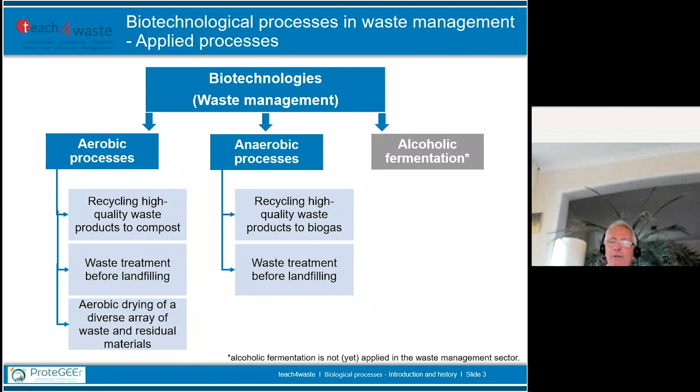And so why biotechnologies are so important in the area of waste management. And I will give you some specific properties about biotechnology. On one hand, you can use it as large, you see here, and small technology, like the composting in your own garden or a small facility in agriculture area, and huge one in more or less agriculture style, industrial style.

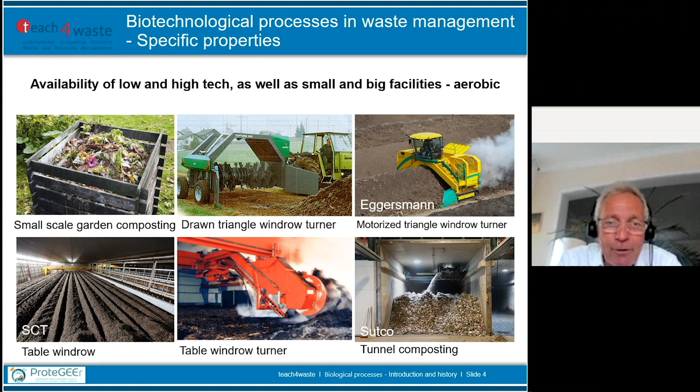That means you start with some kilograms and at the end, the biggest facilities I know from Dutch, it's around 800,000 tons a year. And we have these different areas also in the anaerobic process, in the biogas production process.

You see here a very, very small anaerobic digestion plant. I know it from Vietnam, and a very simple technology in Germany. It's a technology, not so complex, and the high-tech technology. So we have all technology, we use all over the world.

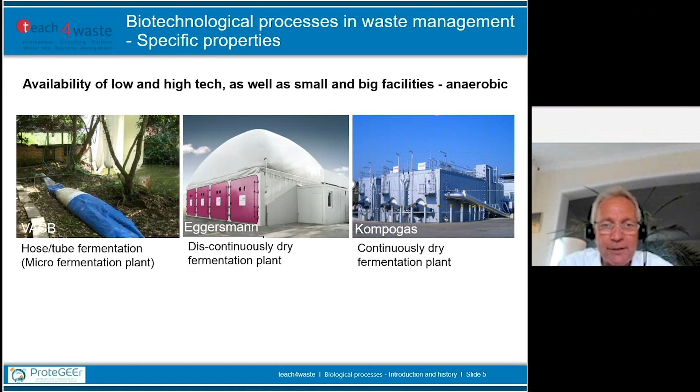Another point, and for me it's a very, very important part: when you are in the area, when you are living in countries like development countries, threshold countries, or emerging countries, there is a very important question you have to ask and answer. This is the question of employees. What's about working places? There's a technology, also with composting, where a lot of people are working inside, and this is fully automatically. So when you have enough working places, this could be an option.

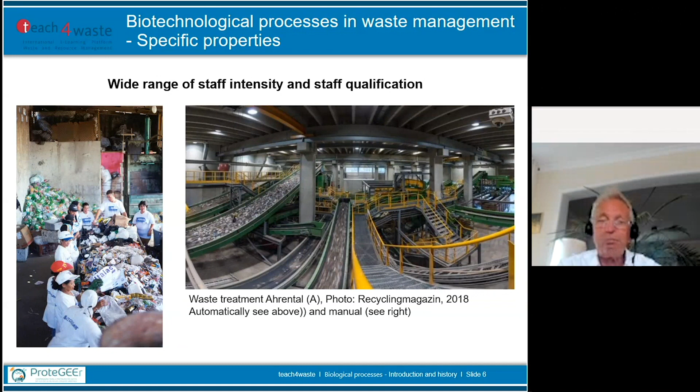But if not, this is a very important part, because this is one question you have to answer according to sustainability. Because one of this column of sustainability are the social aspects, nearby ecological aspects. So this is the consequence: you have very cheap technologies and very expensive technologies. So you can use it and implement it everywhere.

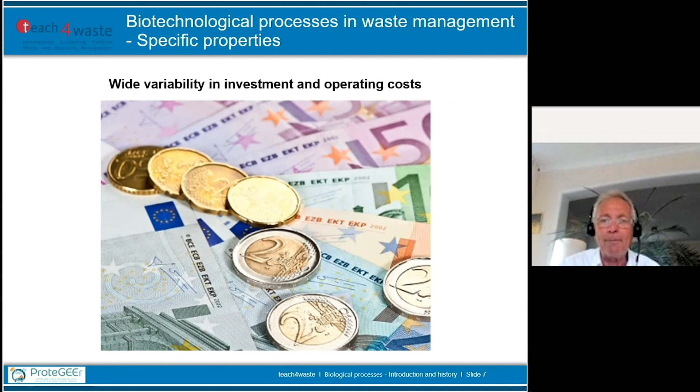Last picture: because of this small and big, it's possible that you can implement decentralized applications. That means, for example, compost facility 1, 2, 3, and 4, and you have only one equipment of technology, for example shredder, screening, windrow turner. So it could be, for a huge rural area, a very interesting concept for your country or for your area.

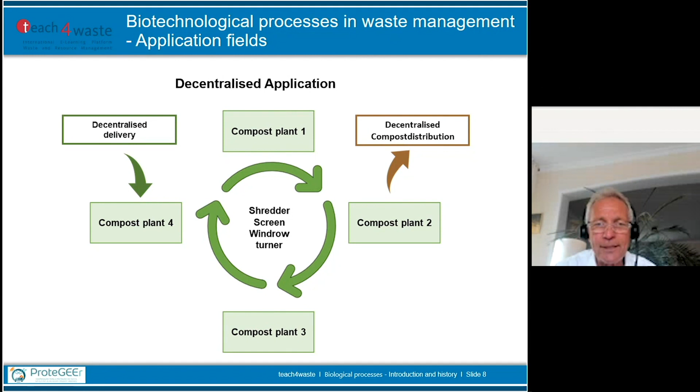Don't be afraid of the next part. I will talk a little bit, I'm absolutely sure only a little bit, about microbiological fundamentals.

So we start with some fundamentals. Microbiology means you have very small organisms. This is the first main point, and these are the oldest organisms we know, around 3.5 billion years ago they appeared on our world.

Some higher organisms we have since 750 million years. But what is most important for microorganisms? They are on one hand ubiquitous, they are everywhere, omnipresent, and they are very adaptive. That means they could live from more or less 0 degrees up to 135, from pH value 1 to, meanwhile we know, some 1 to 14, and high salt and pressure amplitude.

So these are organisms where the most important thing is they are very adaptive, also very adaptive to the different kinds of raw materials we have for composting treatment on one hand, or for anaerobic digestion.

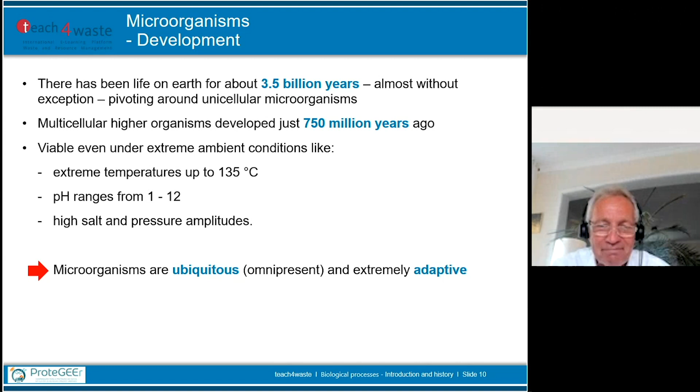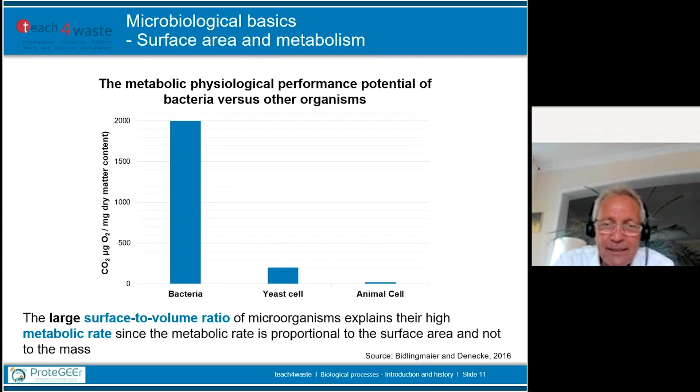But like human beings, they are what they eat. That means bacteria need more or less the same ratio in the raw material to have an optimal degradation process. So 20 to 5 to 1 is the ratio we need in the raw material as an orientation.

So we have to talk about enzymes. Why? Without enzymes, it is not possible to have an efficient degradation of the products of photosynthesis. Microorganisms mainly use biocatalysis, meaning enzymes reduce the half-life of reactions from 300 years to about 1 second.

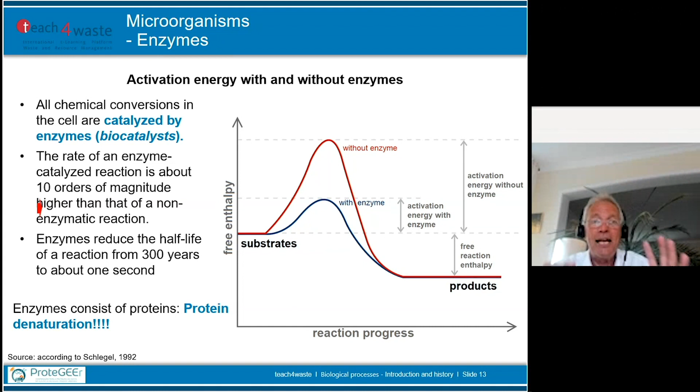At first, the activity of the proteins, the enzymes, rises more or less parallel to the rising temperature. But there is a moment, a temperature level, where we get protein denaturation - it's more or less like a fever in our body - and then the activity of the enzymes collapses. This happens in the area between 50 and 58 degrees.

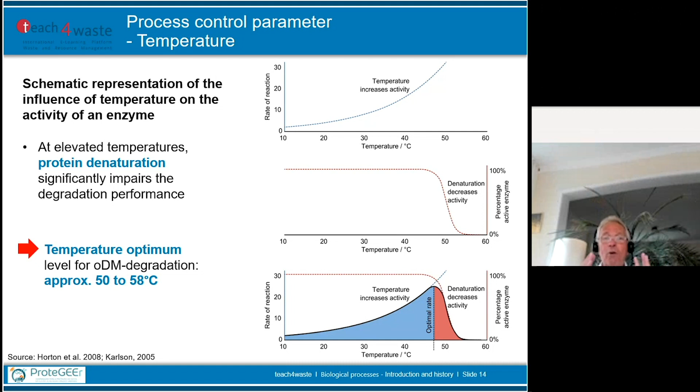So if you want a high efficiency of degradation using enzymes, the only way is to operate your process lower than 58 degrees. This is not always very easy, but it must be the target of the composting process.

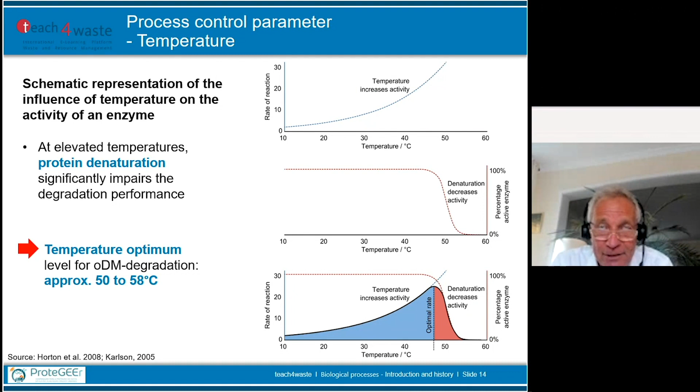The next point, when we talk about microorganisms and microbial degradation, is photosynthesis. I don't want to explain it because everybody knows what photosynthesis is. This is the basis for all biomass production, and also the following products of animals. All biomass products are based on glucose, starch, proteins, fat, cellulose, and also hemicellulose, lignin, and humic substances.

But when you have this so-called loss of ignition, this is a kind of analysis where you more or less burn the sample. Then also the other organic components will be burned—that means plastic, rubber, and leather. At the origin, plastic is an organic component; it's oil-based or coal-based, same with rubber and leather. But these components are not available for microorganisms, and everybody has heard about it—otherwise we wouldn't have the problem of marine litter.

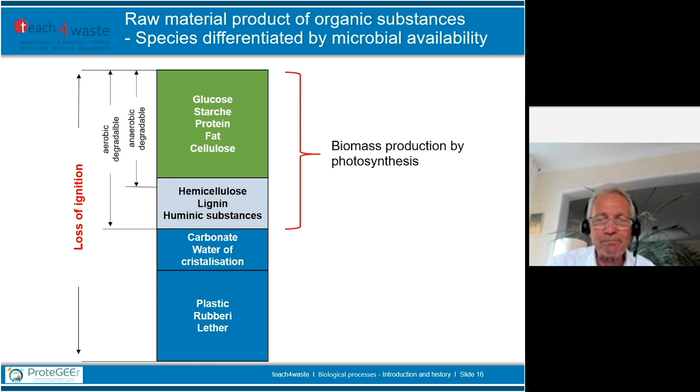And there is a differentiation. All of these organic components are degradable by aerobic microorganisms, by the composting process—also hemicellulose, lignin, and huminic substances. And for the anaerobic process, that means the process where we produce biogas, the microorganisms can only degrade glucose, starch, protein, fats, and cellulose. So we call this the so-called biochemical omnipotence. That means all products created by photosynthesis, and also the following products like animals, are degradable by microorganisms. This is so-called biochemical omnipotence.

And otherwise, if we didn't have this biochemical omnipotence, we would have more or less a 40 meter high column on our Earth made of organic components. Relevant for all this degradation are bacteria, actinomycetes, and fungi. And again, this biochemical omnipotence is based on the aerobic process, that means with the use of oxygen.

Sorry for these pictures, but if you want to go a little deeper in this area, you have to know a little about the different phases of composting. Christiane can present the script of this lecture—it's meanwhile 350 pages, and you can read about it there. For me, I only want to explain a little bit about the last step, number 4. This is a so-called respiration chain. In this area, the main demand on oxygen can be gained by the microorganism, and otherwise the highest amount of energy in the form of ATP can be generated.

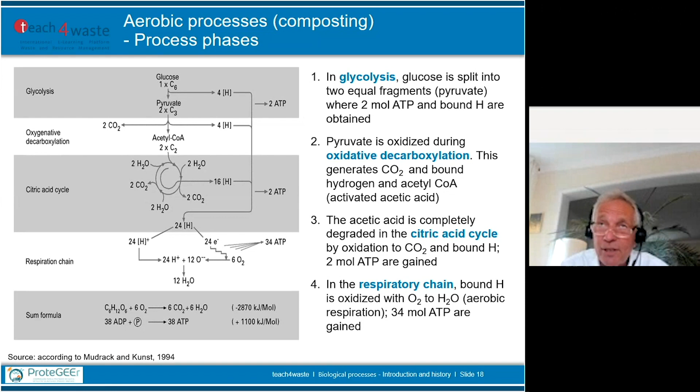So there are some structural facts you have to learn. This is, for example, the aerobic degradation process. We have glucose, C6H12O6, plus 6 O2. The result is 6 carbon dioxides and 6 molecules of water. But what is very important is that you also get a lot of heat and ATP. That means you release a lot of energy during the degradation process, and the microorganism can use a part of this energy to recreate biomass.

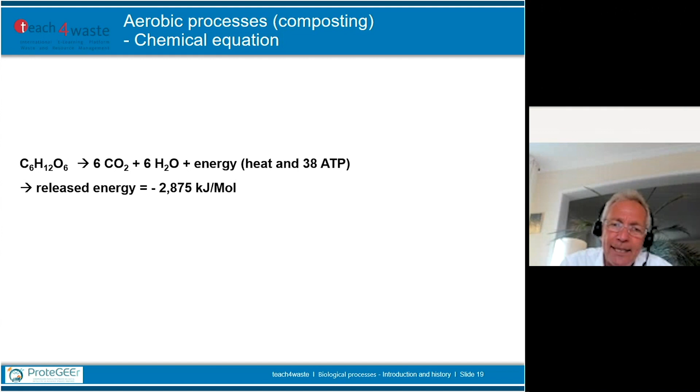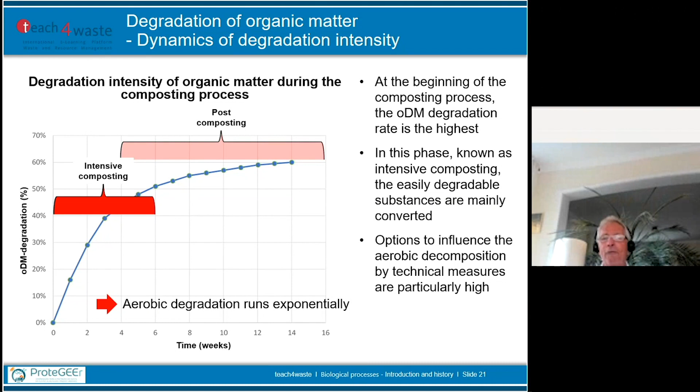This is very important for these two processes: the aerobic one, and the anaerobic one I want to explain next. Again, the aerobic process has a degradation which runs exponentially—this is very important. At the beginning, when you have the easily degradable components, you have high performance, and at the end the intensity decreases. Now we move to the area of the anaerobic process, that means biogas production. These are the components: carbohydrates, fats, and proteins.

In the first phase we have the hydrolysis. You can describe it in a technical way like a shredding process—large molecules are shredded into very small ones so that microorganisms can degrade them. It's called the hydrolysis phase. The second is the acidification phase, meaning there is production of acids. The third is the acetogenic phase, and the last is the methanogenic phase, in which the methanogenic microorganisms produce, from H2 and carbon dioxide, methane, and from acetic acids as well.

Here is a very important part: these two processes you can drive with oxygen and without. So the entire anaerobic process is partly aerobic and partly anaerobic—the third and fourth phases are absolutely anaerobic processes.

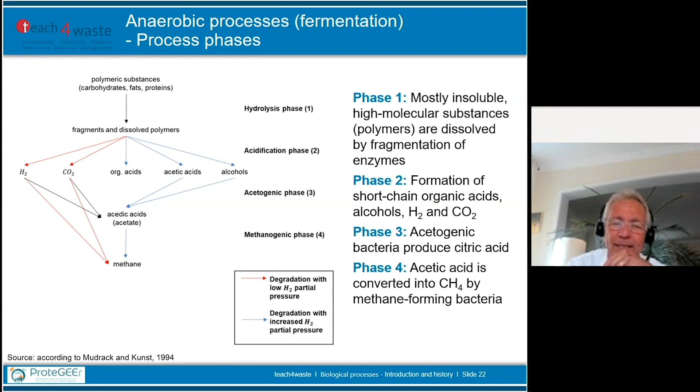So now this is right. Again, we have the same raw material—an idealistic kind of biomass. We have production without oxygen, and as a result we get carbon dioxide and methane, and only 2 ATP, a very low amount of energy. But, you know, in physics we say there is no lost energy—it's not possible that you lose energy. So again, we have 36 ATP from the composting process and only 2 from the anaerobic process.

This is the reason that when microorganisms could choose, they take the aerobic process, because it's much better for gaining energy for the reproduction of cell mass. So when we have an anaerobic process and you introduce oxygen, immediately the anaerobic microorganisms will die, because the microorganism group will change to the aerobic process by using oxygen.

Next slide. Oh, sorry. Yes, sorry. No, again, the water.

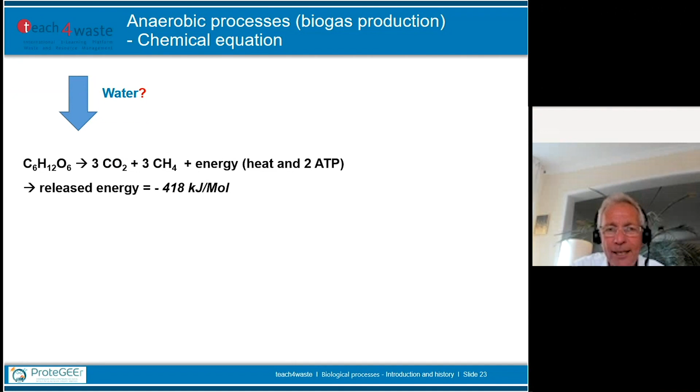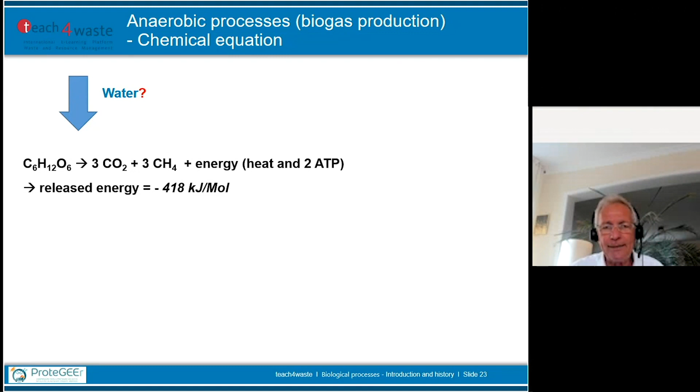I don't know why we find in the literature only this structure. Normally, when you make an entire mass balance, you find it in the script. You have to add water. Without water, no chance to degrade materials. So the real formula is much more complicated, and you have to add nitrogen, you have to add sulfur, and so on. But this is a good way to explain this kind of faults. And the same, like in the aerobic process, we find a degradation which runs exponentially.

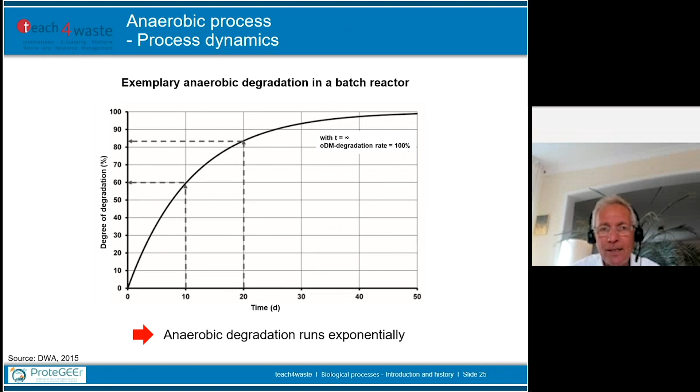So before we talk a little bit about raw materials, I will present you a very simple result, an ecological result. We make a lot of ecological balances, and at the end, it is a very clear result. The cascade utilization, that means the combination of anaerobic process and post-treatment by composting process, is, from an ecological view, the best way for recycling of organic matters. So very important part.

We started in Germany, for example, with the composting process, and since around 20 years, we started to add also the anaerobic process. And at the end, you will see why it's a question of technology development, but also a question of money. But I think at the end, you will know why it's so complicated to implement this cascade utilization. Cascade utilization means at first taking out the energy, and in the second step, producing fertilizers and soil conditioners.

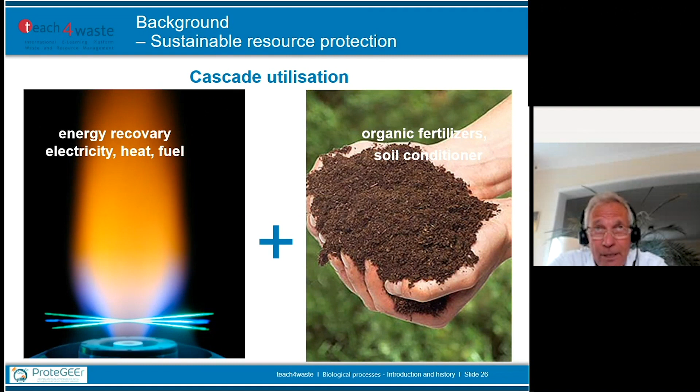Now I will talk about 50 minutes about raw materials. And we have to discuss, or you have to discuss, at the moment it's not possible, we have to discuss later, what is the best solution for everyone. For example, taking a collection system with the entire municipal solid waste, or having a separate collection?

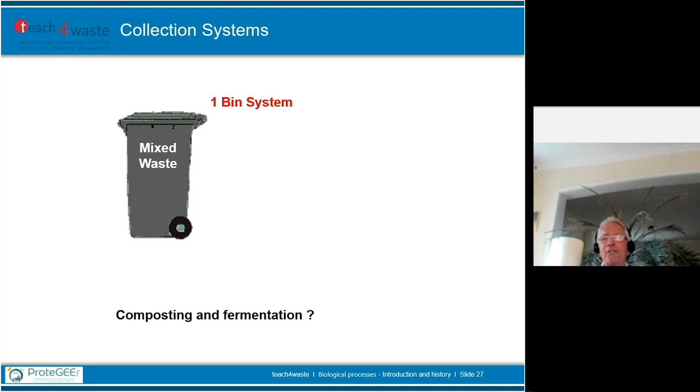Next slide. Okay, the main question is, do we need a separate collection in Germany, in Europe, worldwide, or not? And the problem is I can't give you a clear answer. But at the end, I think you will see where the problems are.

So we started in Germany in the beginning of the 80s with a separate collection of the organic kitchen and garden waste in the green bin, and we have the remaining municipal solid waste in the gray bin. So the main question and main requirement was to produce a better compost than in the history we had in Germany.

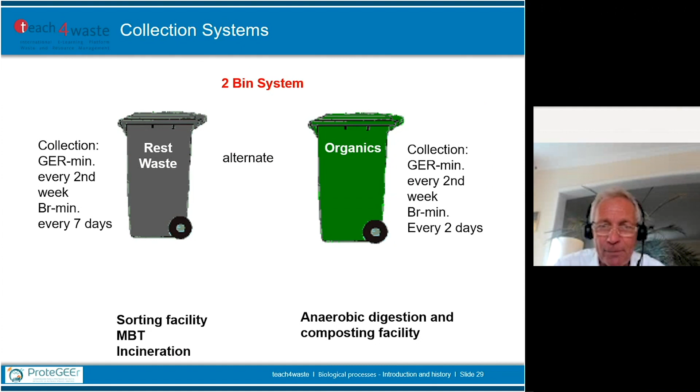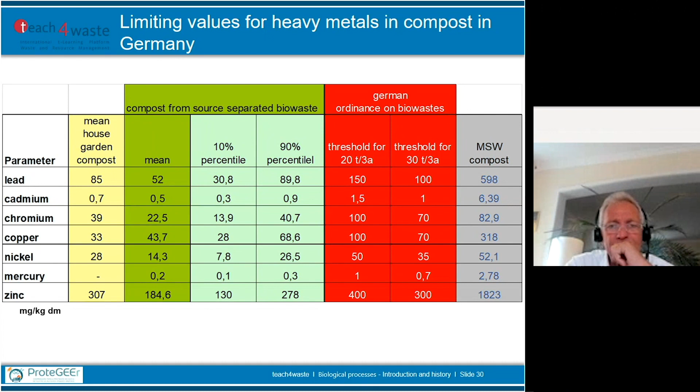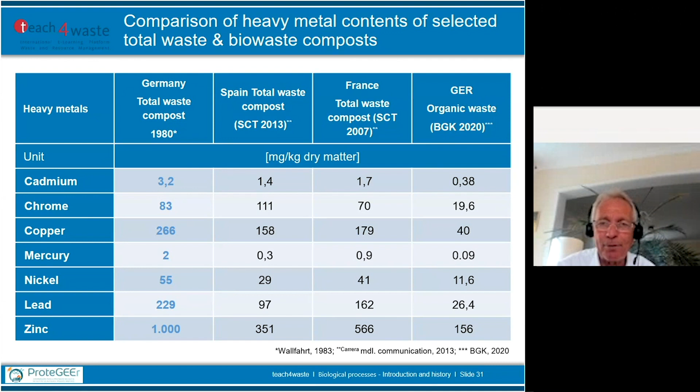And mercury. Background and reason for this reduction of heavy metals is the closing of sources of heavy metal emission. The main emissions are coming from wet deposits, that means from air emission, but also from fertilizers, for example when we talk about cadmium.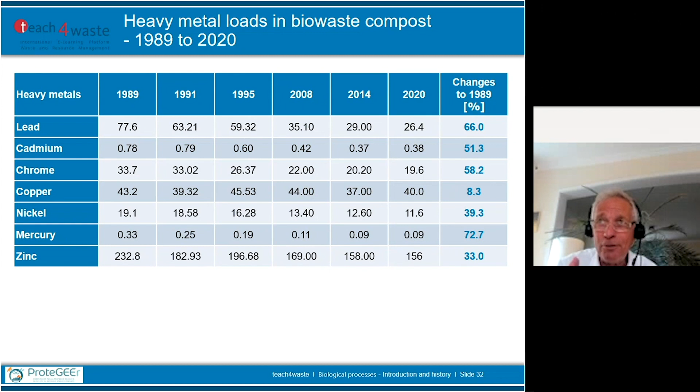So we have to ask, do we have the same development in other countries? Then maybe in combination with better technologies, we can reduce the amount of heavy metals. And you hear a little bit that I look for a reason not to do separate collection.

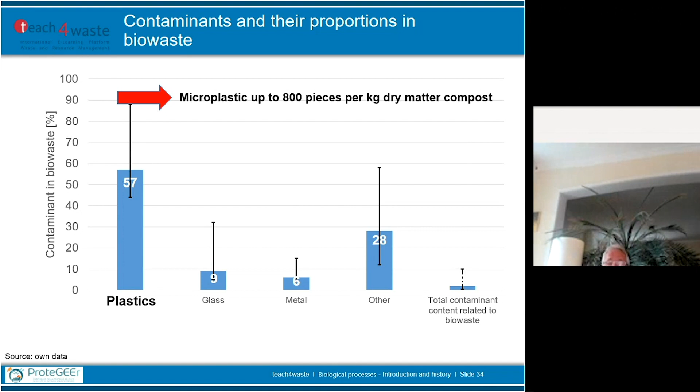So these contaminants in former times were not a problem. But now I will give you a number, you see it here on top. In German compost, we found 20 to 800 pieces per kilogram dry matter of microplastic.

When you have this background, we have to think about separate collection versus mixed waste compost. It's not only a question of heavy metals, it's meanwhile also a question of littering of plastic, particularly littering of microplastic.

So it's so complicated to find a way to release the opportunity to produce a mixed waste compost. Because of this problem with this high amount of plastic pieces or microplastics in the compost, we changed our law.

That means the law says all these refining steps to get out the impurities, we have to do before the composting process. Because in the composting process and in the shredding process, you shred the plastic and produce microplastic. At the moment, I don't see a way to find a solution to use compost from mixed waste.

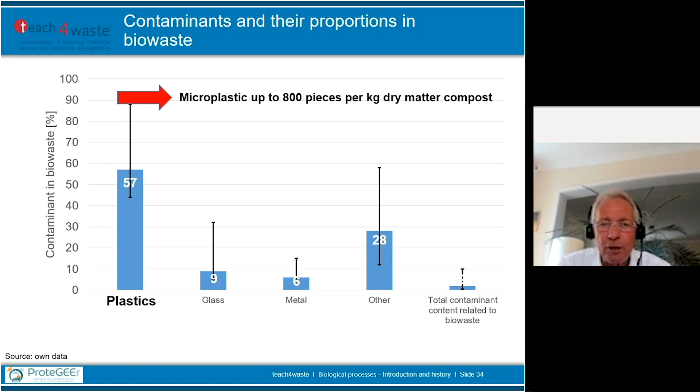And the worst separation in Germany of bio-waste we find in these social, not easy structures in our cities. So we have a high amount of plastics, a high amount of impurities, and a very low collecting rate.

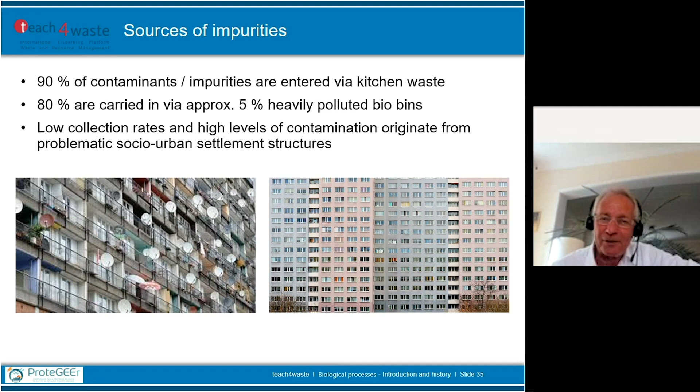So forget what I said about the quality of separate collection. I will give you the newest information about German waste composition, and come later on to international waste composition. We have in Germany separate collection of bio-waste, but in our remaining municipal solid waste bin, we have

39% of bio-waste. This is a very high number, and this means the separate collection doesn't work very well in Germany.

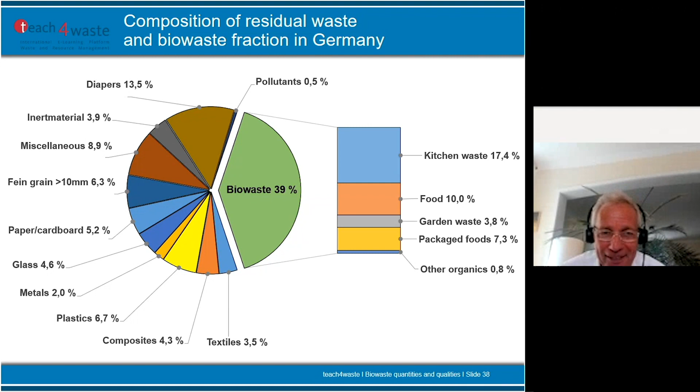But what we also see is when you look at how the composition of the bio-waste is, then we see 10% food, 7% packaged food. That means that we have in Germany every year 6.1 million tons of food in the waste only from households.

We also have around 6 million tons of food waste from industry and from trading. This is a value of more or less 21 billion euros every year.

And the first analysis we found was from the UK, they made the first analysis. In Europe the numbers are all more or less very similar. But what does it mean for composting and anaerobic digestion?

That means very clearly that this material, this 17%, is not for anaerobic digestion and not for composting. This material we have to avoid, because by avoiding this high amount of food waste, we could save a huge amount of greenhouse gases, energy and water in production. So, first point: to find a sustainable way for bio-waste is avoidance.

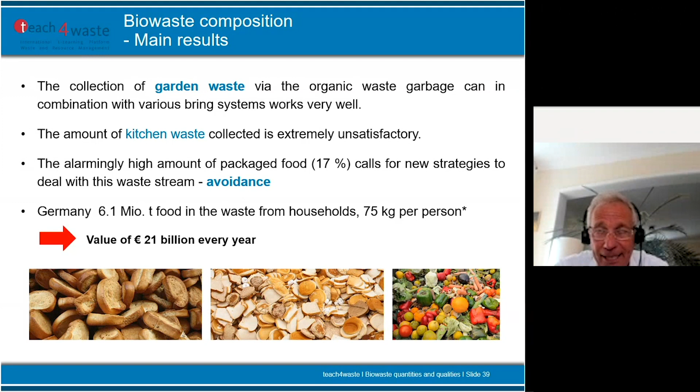When you compare this with paper and cardboard, it's 78%, or glass, 84%. And on the next slide you see we have these low degrees because some municipalities have only a collecting rate of 30%. But it is possible, when you do it right, with good PR work, good education, good controlling measures, to lift up the bio-waste collection to 82%, or paper and cardboard up to 92 or 96%.

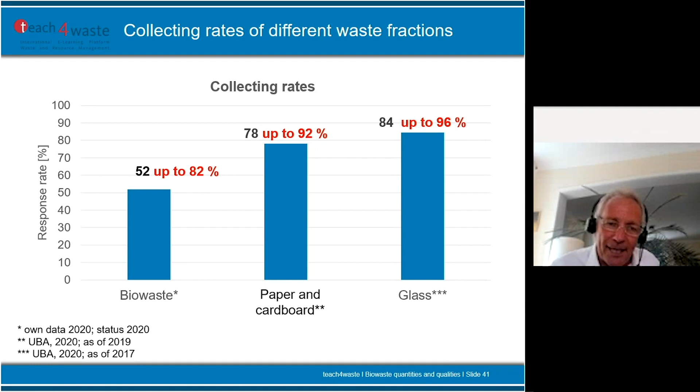So there is a very high potential for optimizing. This is the development in Germany. We started in 1983, and I think we needed more or less 15 years before the responsible politicians said, okay, this is an idea we have to lift up and implement in Germany. Now I think nobody discusses the bio-waste separate collection anymore. But at the end, we must say that despite this very high amount of education and PR activities, the collection rate in Germany is still too low.

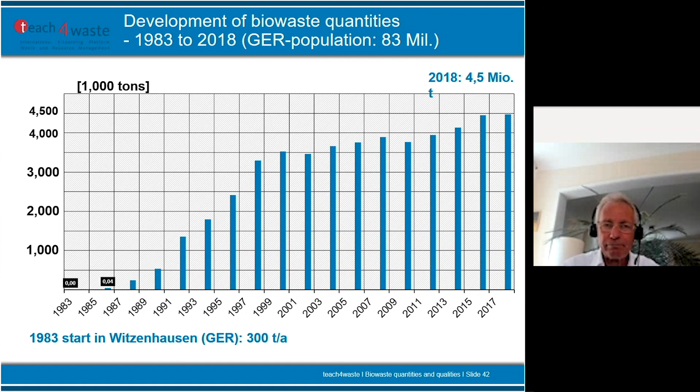Before we come to the composting process, let me give a short overview of anaerobic digestion. I've given numbers from Germany, but I'll also relate to other countries. This is the development of anaerobic technologies. We have more or less 10,000 facilities in Germany. 95% of these facilities are not dealing with organic waste, they deal with agriculture waste and special products produced from agriculture, not waste.

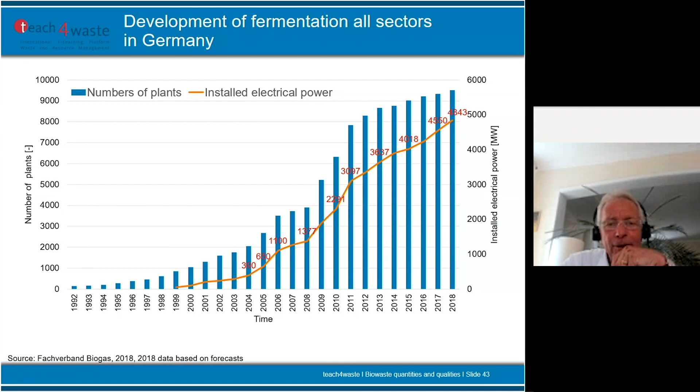But the main point, the background I'll show on the next slide, is what led us to start with anaerobic digestion. In 2000, we created a law called the Renewable Energy Act. With this law, we financed and funded anaerobic processes and renewable processes, and one of the renewable processes is biomass use and biogas production.

And in 2015, we formulated a law that requires anaerobic digestion. So when you compare this to the situation in many other countries, there's one very important point: composting is much cheaper than anaerobic digestion. When you don't have funding, it's more or less impossible to build such technology. Otherwise, if a group of politicians wants it and is willing to pay more, okay, but normally composting is much cheaper.

So the fundamental basis was built in the year 2000 with this new law, so that instead of only 6 euro cents per kilowatt hour, you get a factor of 4 - up to 24 euro cents per kilowatt hour. This was the basis for starting anaerobic digestion in agriculture and later in the waste management area. We started more or less in 2000.

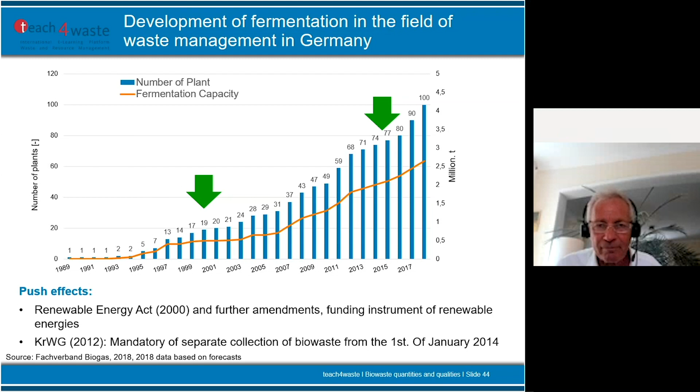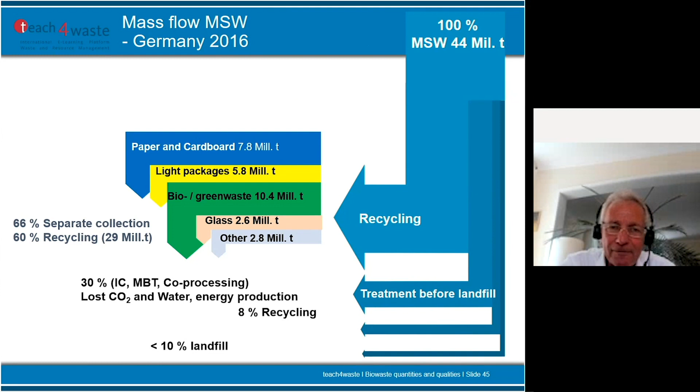And here at the end are the results. We have in total 44 million tons in Germany, and we recycled 10 million tons of bio-waste through separate collection, plus paper, packaging, glass, and other components. You now have to ask the question...

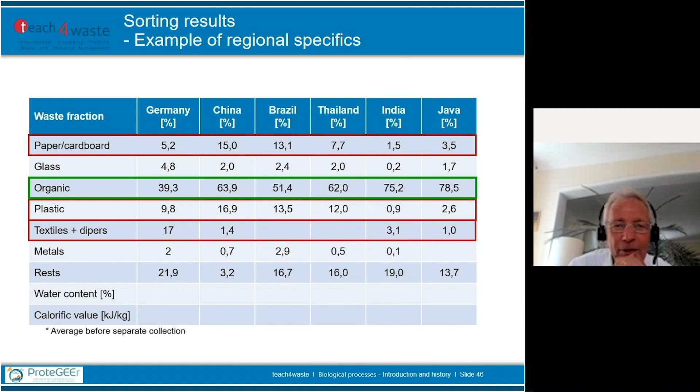I'll show you the next two slides, and then I'll ask this question. When you look at this table, Germany is on the left side, and in the middle, Brazil, Thailand, India, Java. What you can see is the green-lined numbers: Germany 39.3% of bio-waste in the rest waste, the remaining waste. China 64%, Brazil 51% - I can't believe it, but these are the actual numbers. Thailand 62%, India 75%, Java 78%.

That means the organic fraction, particularly in developing and threshold countries, is much higher than in industrial countries. And there's one point which is very important: it's not the absolute mass that's different, it's the percentage that's different. That means you have a basis of organic components in your waste, and as industry develops and packaging, paper, cardboard and other components increase, particularly paper and plastic are rising.

The organic matter normally stays in the same amount, and this is very important for the composition and its consequences for the water content. In combination with the water content and the low amount of energy-giving components like plastics, the calorific value of many wastes is very low. That means waste which doesn't achieve a minimum of 6,000 kilojoules per kilogram won't burn by itself—you need coal, gas, or oil.

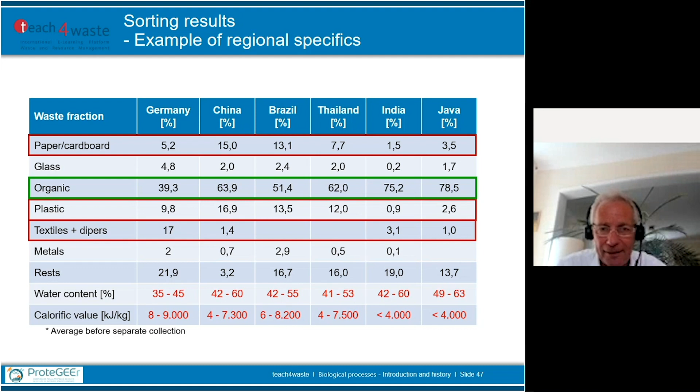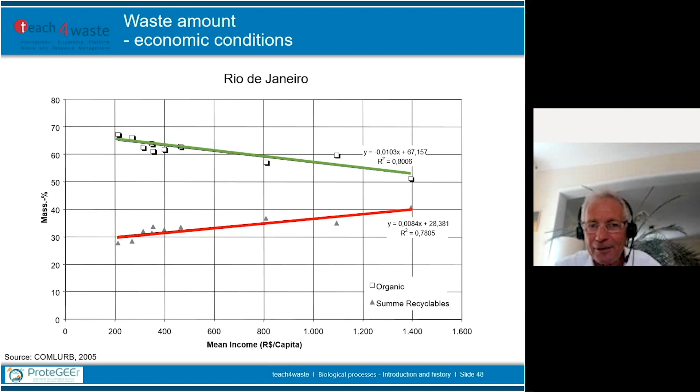This shows the development—mass concentration and the development related to mean income. With higher income, you have a rising amount of packaging, and the percentage of organics decreases. In reality, the absolute mass of organics doesn't change, but the amount of plastics and packaging is rising. This is very important for your future prognosis of bio-waste components.

For example, we did a prognosis for a city in the state of Sao Paulo from 2003 to 2014. We have a population growth of 11-12%, but an increase per capita of 24.4%. What does this mean? On one hand we have an increase of population, and you know population growth in Brazil is very high, but we also have a change in the absolute amount of waste products—this is a rise in packaging and newspapers.

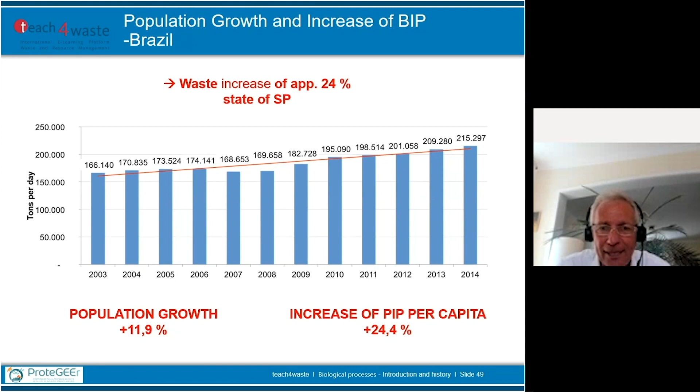So this is a very important part—more or less the organic components are stable. Before I come to the end of the first part, you see here the different kinds of developments you will have in your region—population growth, depending on your numbers, to use for the prognosis.

Glass—we expect a reduction intensively next time, and we think in future it will not be necessary to collect glass because of a change from glass to PET. Paper and cardboard—terrible, Corona gave it support. Packaging shows a huge increase, but print products are decreasing. Light packaging is rising while light packaging metals are decreasing. Food and garden waste show no change. And we have a huge problem with diapers.

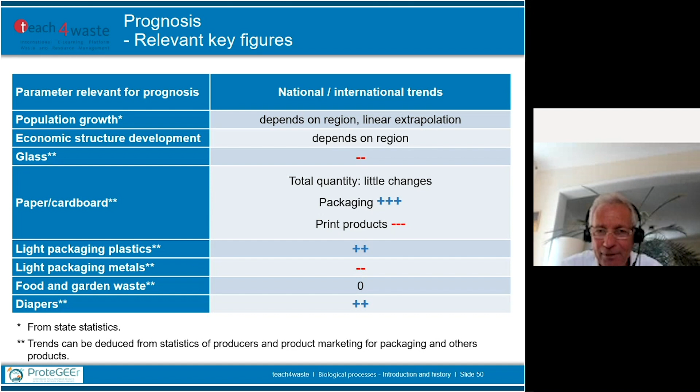Now the last picture, and then we come to the different kinds of processes. There's a prognosis in Germany from 2015 to 2024, and I think you will find it similar in most countries of the world—a minus of around 20% of glass, minus 20% of metals, plastic plus 30%, paper minus 30%, cardboard plus 30%. This is the new way of shopping—online shopping is the main point of this development.

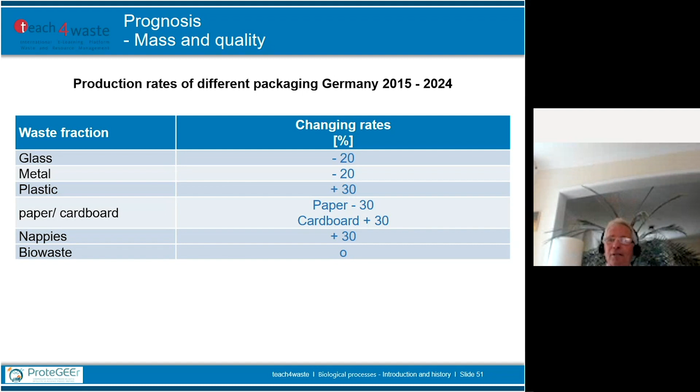And nappies—what happened with nappies? Why do we have a plus of 30%? That's very easy. Not only me as a very old man, but the Germans in general are, on average, a very old group of people. I think the oldest community is the Japanese. We found that in Germany, within 8 years, the amount of nappies for old people reached the same number as nappies for the young. This is the background for this rise.

This development we have in all countries. We are, after the Japanese I think, in place 2, and Brazil is a very young country, but we have in all countries, also in China, very similar development—only some years different from the development here in Germany. So this is a big problem.

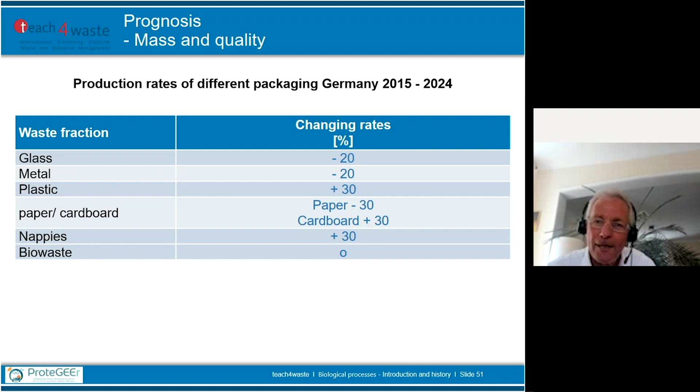Why? The component inside the nappy is biomass, and this biomass produces a lot of greenhouse gases. When you bring it to landfills, we have the typical problems with landfill gas production. So this is the background for these different kinds of waste fractions and the background for doing some prognosis. So when we talk in Europe about waste management, we talk about climate change.

I will give you some information about climate change in the area of waste. The main problem is that in all statistics, the impacts of waste management are not correct. Background is that some reduction of greenhouse gases are not summed by the waste management. For example, it's listed in the area of energy or industry instead. I will give you some ideas about it.

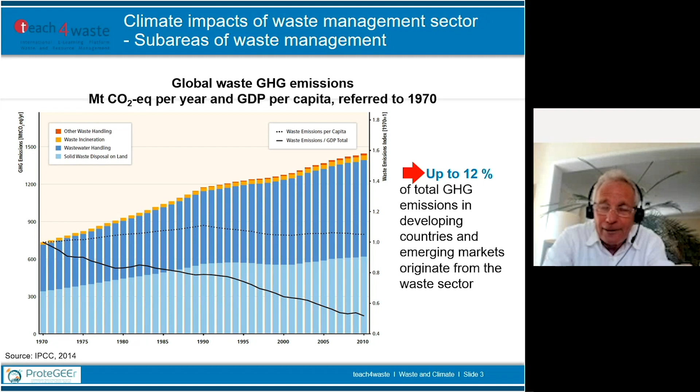So generally we say that in threshold countries and development countries, the waste management area is responsible for up to 12% of greenhouse gases. Today I talk only about bio-waste. When we have the meeting next week, I will give you other ideas where we have the main reduction results.

So this is again the number for Germany, but it's easy to get a feeling for your own country. This is 1990 - you know that all numbers about greenhouse gases are based on the year 1990. So in Germany we have 38 million tons of greenhouse gas equivalent. That means all of the gases - not only carbon dioxide, but the equivalent of carbon dioxide. I think everybody knows what the equivalent is.

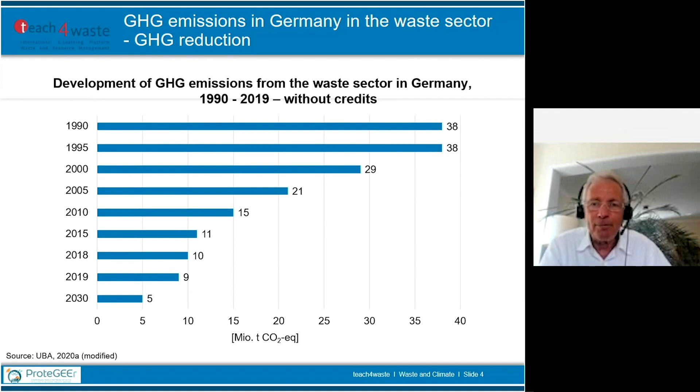In the year 2019, we have only 9 million tons. But in all our statistics - in Germany, in Europe, in the whole world, because of IPCC - we only consider the emission of greenhouse gases. For example, the emission of landfill, the emission of incineration facilities, the emission of recycling facilities. So when you see where it comes from, it's landfilling.

You know that in Europe, we have forbidden landfilling of fresh waste - waste with a high amount of organic matter that could degrade on a landfill and produce methane emissions. Landfilling is 80% there. For Brazil, I want to give you an estimation - I would say it's around more than 90%. Because of the higher amount of organic components, you have very high emissions from landfill.

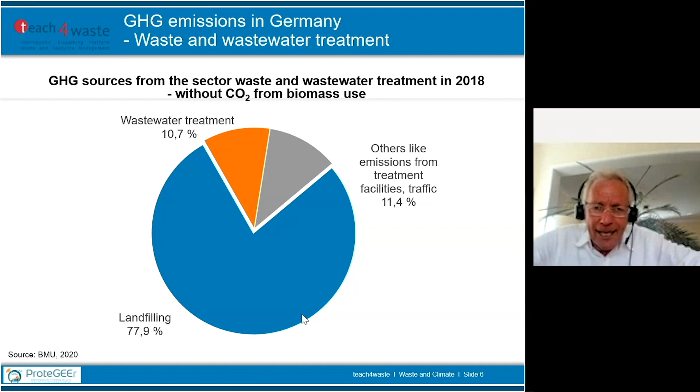You have to know this is a very important part. We have very modern landfills in Germany with a huge effort for collecting gas and using it in CHPs. But the gas we collect from modern landfills is not higher than 30%. The background is that in the operation phase, most of the methane is produced, and only later do you cover your landfill and implement your sucking systems. So the best landfills are not able to collect more than 30%, maximum 40%, of greenhouse gases.

So it is very important to discuss the situation of separate collection versus mixed waste treatment. I think when we finish today we have to discuss it, because if we want to find, in a short time, a high reduction of greenhouse gases from landfill - if possible - I think it is not possible to implement separate collection systems quickly.

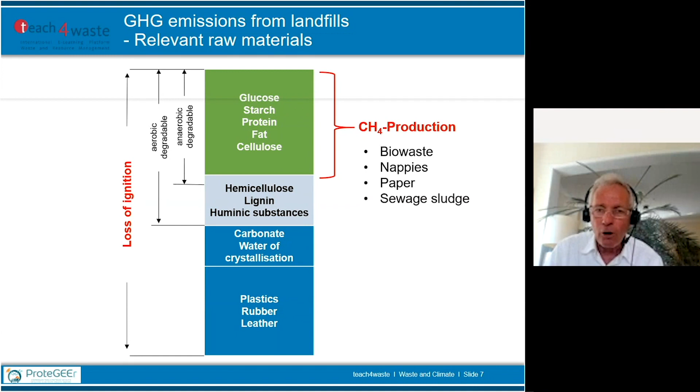You need 10 to 15 years - we needed 15 to 20 years. But when I think about bio-waste in Brazil or other warm countries, it's not possible to collect it like us, every 14 days - you have to collect it every day. I'm absolutely sure this is more or less impossible. So for me this is a main argument: to find a rapid solution, and this is only possible if we do remaining waste treatment before landfill, by using incineration or mechanical biological treatment.

But let's come back to this idea of emission of greenhouse gases. On the other side, we have not only emissions from landfill and incineration facilities, we also have credits. That means the total balance of carbon dioxide is the emission minus the emission credits. I will explain what credits mean.

You see here in Germany we have a reduction of 29 million tons of greenhouse gases by closing landfills, more or less. But we gain 30 million tons of carbon dioxide equivalents by credits. That means per person, up to now, 0.72 tons carbon dioxide equivalent per person.

What are the credits? I think this is a very important part, and you have to understand it before we look for bio-waste and similar components. For example, if you make recycling for paper, you save a lot by using secondary resources. That means you save a lot of energy, and by saving energy, you reduce the emission of greenhouse gases, of carbon dioxide equivalents.

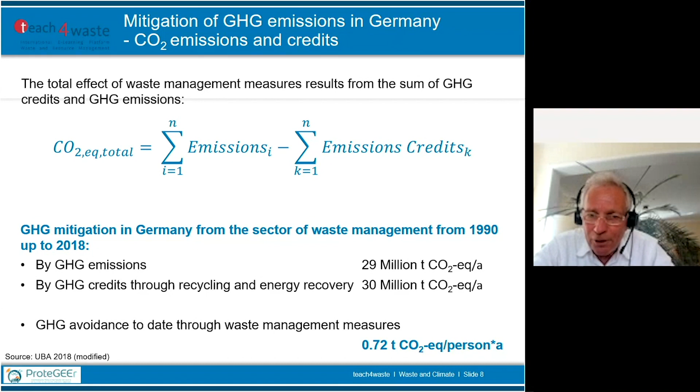This is the background why all the activities in waste management, by recycling or by avoidance, we get these credits. I know in Brazil people often discuss that waste management is not so important. Here you see the importance of waste management when you add the credits from saving energy or saving the gaining of raw products. For all these products you need energy, and by saving energy you save the greenhouse gas equivalents produced by producing energy. In a country like Brazil, it's not so much because your carbon dioxide factor is lower than in Germany. But when you look at China, India, or Australia, you have a very high carbon dioxide factor. This is the background you need to know when we talk about waste management and climate change.

Recycling of bio-waste: first we have biogas utilization and compost use. I will explain through the climate balance why this is so important.

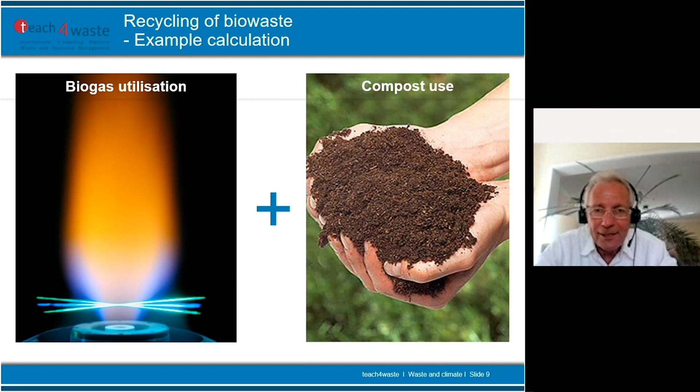Then there's the transport of the bio-waste to the facilities, but in this case we don't consider it, because otherwise we'd have to transport more of the entire mixed waste. Then energy consumption of the treatment process: you have to recognize and consider this by using the carbon dioxide factor of the mixed electricity supply. In Germany we have a factor of around 440 at the moment, while you have a factor around 100. So you save not as much greenhouse gas as in Germany.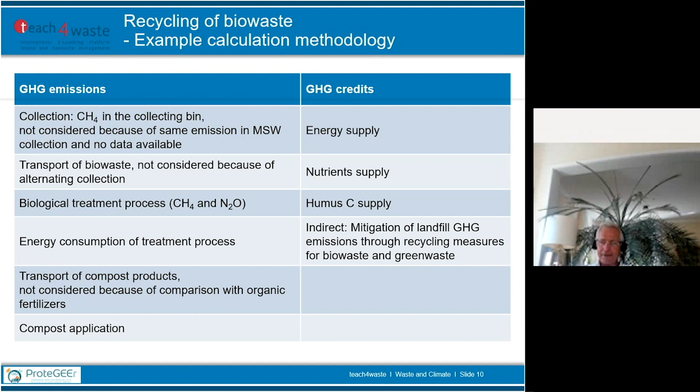But now comes a very important part: Humus C supply. The main value of compost is on one hand the organic matter, and on the other hand the nutrients. But nutrients are only around 5-6% of the dry matter in compost, while Humus C is around 30 to 50%. This is the background for soil conditioner, and soil conditioner has the target to increase the humus concentration of the soil.

When you try to find numbers for Humus C supply, you have to look at different kinds of soil providing technologies. For example, a special kind of green seed to lift up the humus concentration. This is a very important part of our balancing. Indirectly, you also have to consider the mitigation of landfill greenhouse gas emissions through recycling measures for bio and green waste, when this material doesn't enter or get disposed of in landfills. All these four points are the credits, and these are the points of emissions.

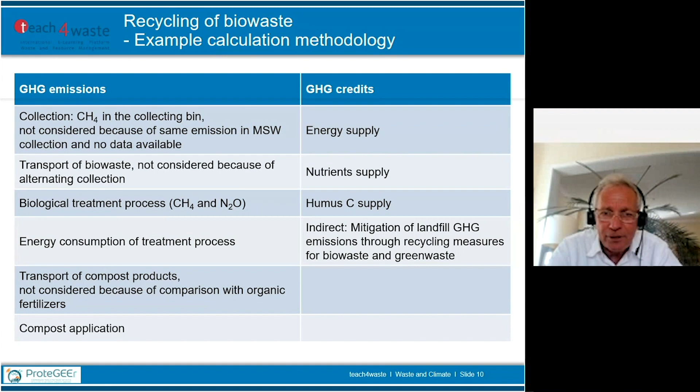Now I will give you some ideas about numbers. Energy consumption for intensive composting - that means a compost facility that's intensive, with a high amount of aeration, with enclosed process areas, and so on. So we have the amount of kilogram carbon dioxide equivalent per ton of bio-waste. There are a lot of opportunities and programs where you can do these balances.

Biological treatment process: 49, that means the emission from the facility. The emission from facilities that is not relevant is carbon dioxide. You know, this is by IPCC convention - carbon dioxide produced by biological process from biomass is not relevant. But when you don't have a controlled process, it's possible to produce methane. All composting processes produce methane. Why?

The problem is, in most cases, particularly without aeration, it is not possible to secure that all areas in the compost piles are in an aerobic situation. You partly have, at every time, also a methane situation, an anaerobic situation in your pile.

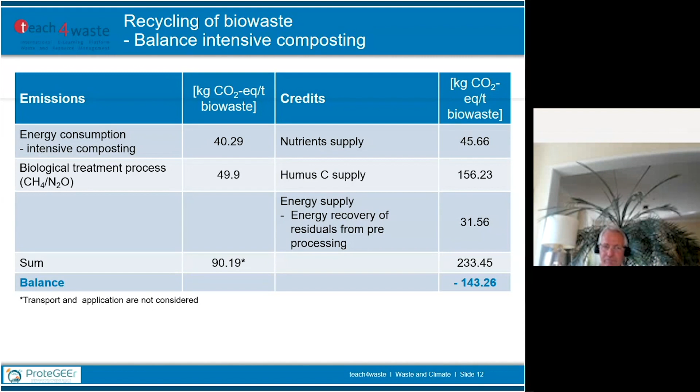And if you have special raw materials, also raw materials after digestion, you have a little bit of laughing gas. You know the problem when you have carbon dioxide, methane, and laughing gas. Carbon dioxide's global warming potential is 1, methane is 28, and laughing gas is 300 - a factor 300 higher potential of climate change.

So laughing gas is a very important part. At the end, we have these two points of greenhouse gas emissions from the process. On the other side, you have the nutrient supply, the humus supply, and energy supply, energy recovery of residue from the processing. This is not so important. So when you take out wood and such kind of components, you can burn it and you will get a credit. So at the end, we have a plus, or normally in these balances, we name it a minus of kilogram carbon dioxide equivalent per ton of bio-waste.

143. It's not so much when you think by recycling of paper you get 1 ton or 1 ton 50. So it's more or less a low degree.

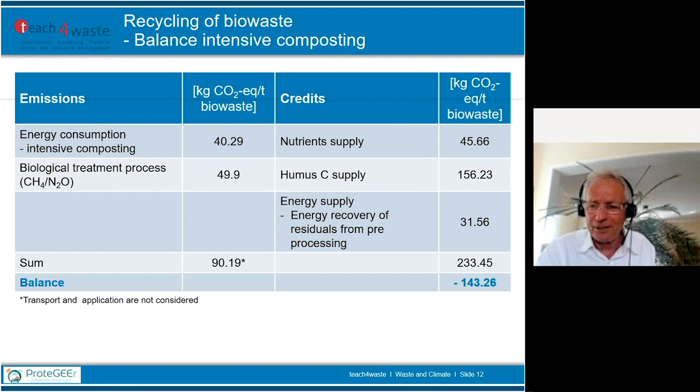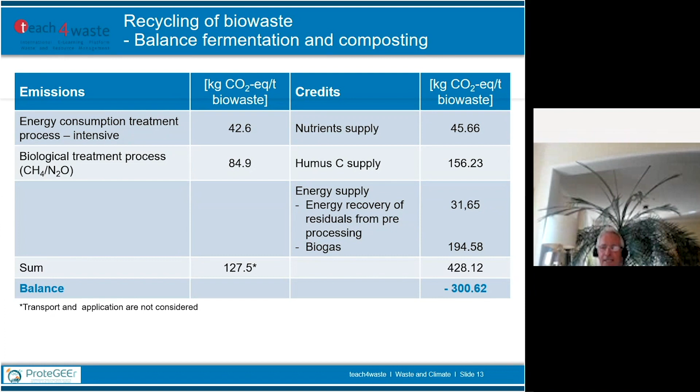On the other side, we have more or less 200 kilograms of credits only by producing biogas. So this is a net balance - that means all the energy we need, we have integrated in this part. So at the end, we can reduce the amount of greenhouse gases only by the process and by the use and by the supply of these values like nutrients, humus, and biogas. So this shows very clearly that the combination system, the cascade system, is better than the simple composting process.

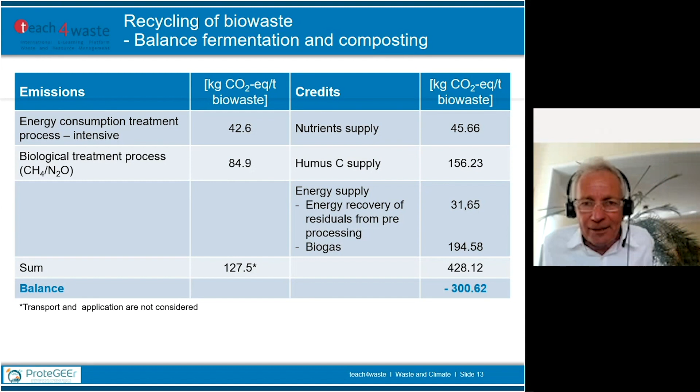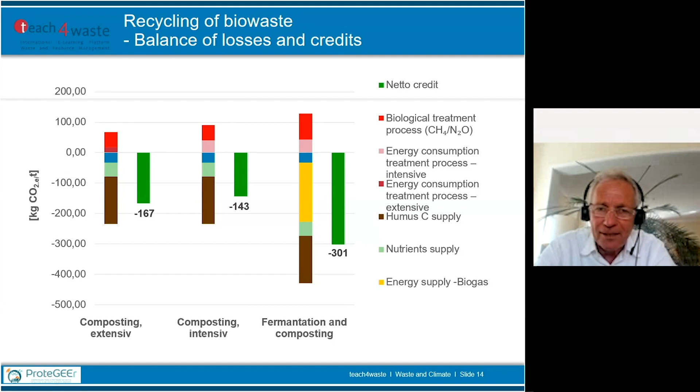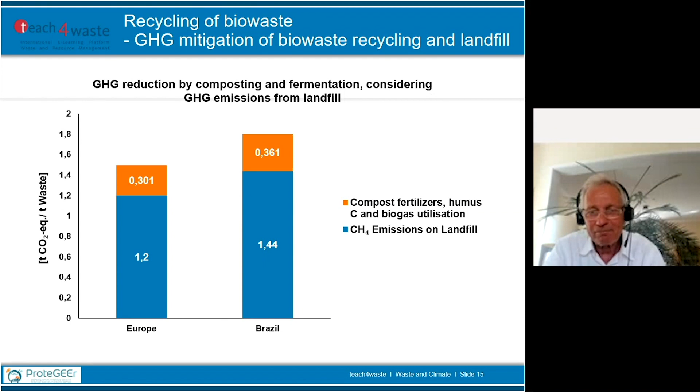10% in Germany 20 years ago. So what are the goals for the future?

We're talking a lot about minimizing volume and mass of waste delivered to landfill. This is, in my opinion, at the moment, particularly in the outside area of Europe, but there are many countries in Europe, particularly the eastern countries, with a similar situation with landfills. So we need an inactivating of the biological and chemical process, mainly the microbiological process of anaerobic degradation. So you can do it by MBT, and I will explain this MBT technology next week, and also the compost and digestion facility.

You can reduce the gas production by MBT with a special kind of biofilter, the methane oxidation filter, by around 90%. And sure, when you use an incineration facility, you can reduce it by 95 to 98%, no question. So these are the technologies to find a way in a short time to reduce a high amount of methane emission.

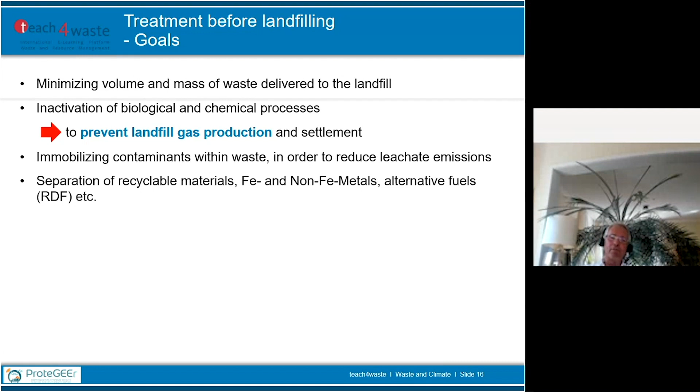And when we think about these ideas, we must change our situation worldwide in a short time, not in 30 or 40 years. This 30, 40 years, you need time for separate collection and so on. So we need a solution in shorter time. So what can we do?

When you cumulate the greenhouse gas emissions of the last 40 years, you will see North America and Europe produced more or less 90% of all greenhouse gas, cumulated over the last 40 to 50 years. So North America and Europe are responsible for climate change. And now China is doing its best to come to the same level, with increasing numbers that are horrible.

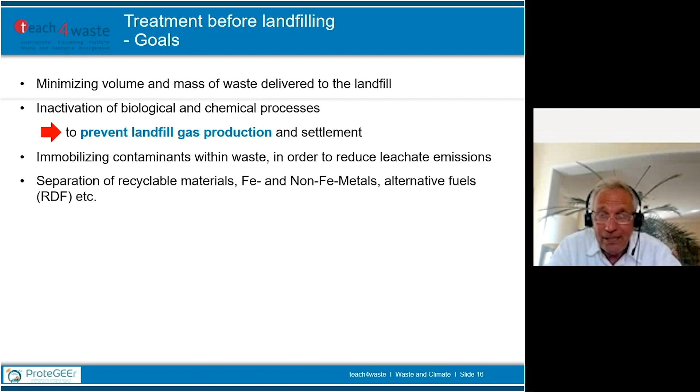Please keep in mind the amount of organic components in waste. You take these organic components and compost them over 2 to 3 months. You can degrade the organic matter by around 60 to sometimes 70%. That means from the normally 200 liters per kilogram, or 200 cubic meters carbon dioxide equivalent we have in 1 ton of waste from landfill, we can reduce it by around 80%.

There is another technology. We produce a compost product by composting, but this product is not compost we use in agriculture. This product we dispose of on landfills. It's a material similar to a biofilter material. So you cover your landfill, and with a covering of around 1 meter thickness, you have a surface layer which works like a biofilter. We call this biofilter the methane oxidation layer, or methane oxidation biofilter, or methane oxidation filter technology.

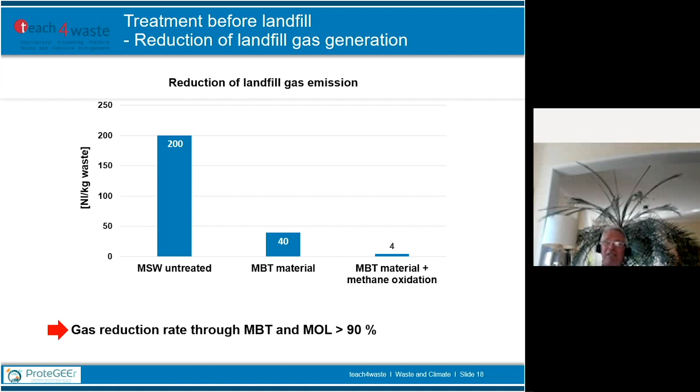It's a biofilter technology, and when you have a low amount of gas from the MBT material from the landfill, again 90% of this material can be oxidized by microorganisms through the aerobic degradation process. It's nothing else than a composting process. So this MBT process can reduce the entire amount of methane potential by around 90%. We will see it in our next lecture, where I'll explain this technology a bit more in detail. Okay, I think this was the last one.